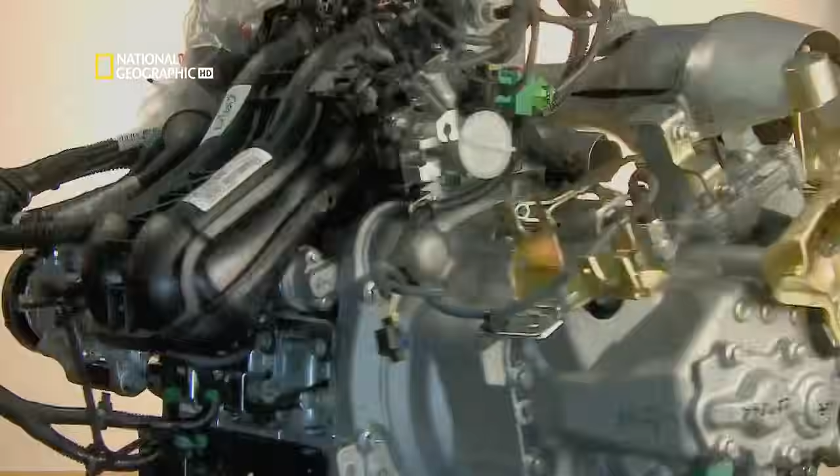And on roads made slick by monsoons, the world's cheapest car. But he'll have to battle skyrocketing costs, huge engineering hurdles, bad press, and violent uprisings. All challenges for the mighty Tata Motors mega factory.

Soon expected to overtake China as the most populated country on Earth, India is already home to 1 in 6 of the world's people. Two-thirds live in small rural villages, seemingly untouched by time. But ancient India is urbanizing at a dizzying speed.

Despite that, only 15 out of every 1,000 Indians own a family car. For most, it's a dream way beyond their reach. They make do with a family motorbike, or get a ride with friends.

But that could change when Tata Motors releases the world's cheapest car, the Nano. It's the dream of company chairman and legendary tycoon, Sir Ratan Tata.

It hit me initially as I saw families riding on two-wheelers, the little kid standing in front of the father driving the vehicle, the mother sitting in the back holding a child, and I thought, my God, this is a really tough way for someone to travel, both in safety and in comfort.

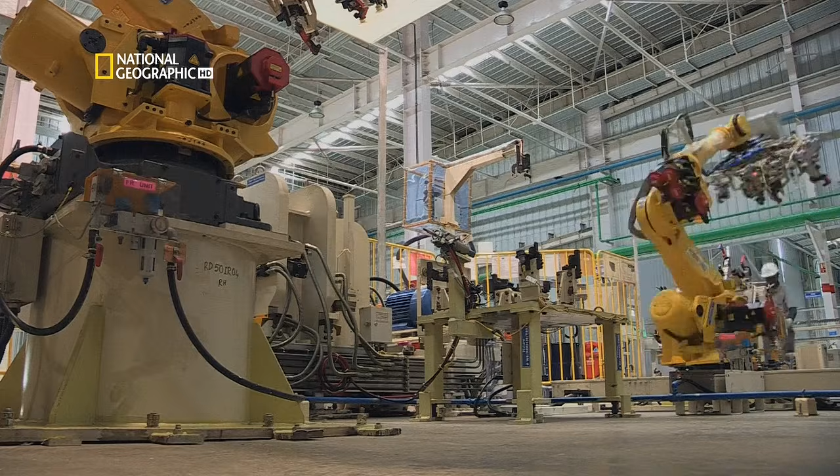But to run them, they'll have to train a workforce of villagers. Just one of the many challenges the team must overcome.

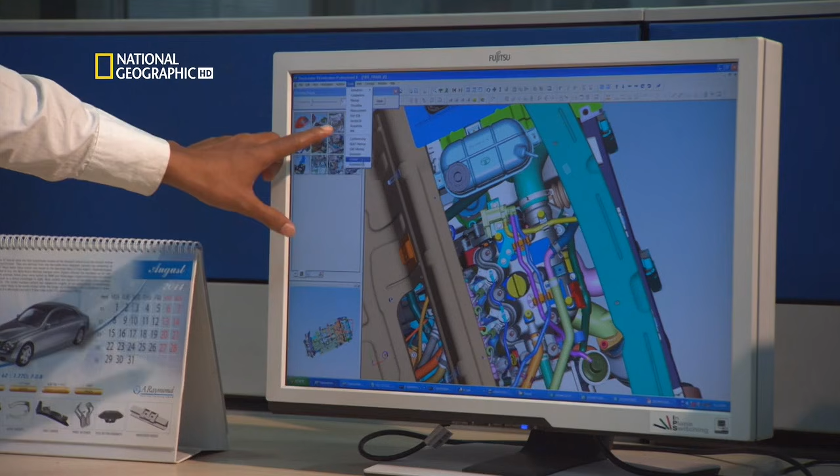They're going to deconstruct the car as we know it and put it back together with fewer parts and at half the cost. They'll have to reduce the cost of everything from design right through to production. But it still has to be a car that people will want. It's a real conundrum. Safety, aesthetics, fuel economy and handling are all going to be important. But if they blow the budget to achieve them, the Nano will lose its unique selling point as the world's cheapest car. No wonder the design team is a little nervous.

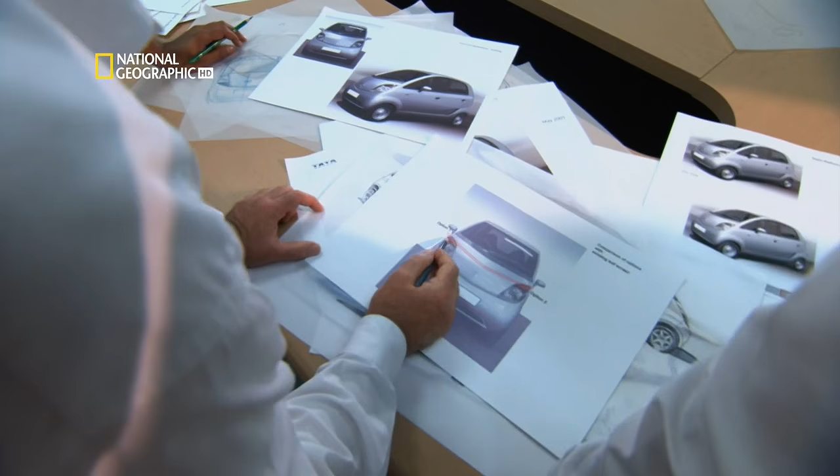The team came back after the meeting with Mr. Tata in 2003. It was really initially very much confusing. Well, there was a lot of doubt whether we can really achieve it. It was really a challenge. We had never heard of a price that low. It was so challenging that I said, hopefully we can do it, but it will be the most difficult project in my life.

If they succeed, the team could make history. The Nano will be a people's car.

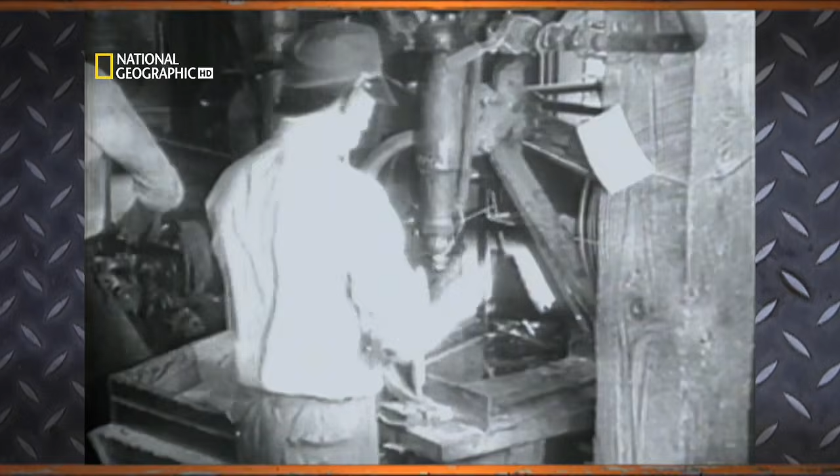India's answer to the Model T Ford. When Henry Ford introduces the Model T, the $850 price tag puts car ownership in the reach of millions of Americans. That's about $21,000 in today's money.

Volkswagen is German for people's car. It goes on sale for today's equivalent of $11,000. The Nano is slated to come in at a quarter of that.

Designing this impossible car happens at the passenger car division of Tata Motors near Pune. Pune is the largest of Tata's 5 plants. It has 20,000 employees. But hardly any of them know what's going on at the Engineering Research Centre. Codenamed Project X3, it's so secret only a select group knows it exists.

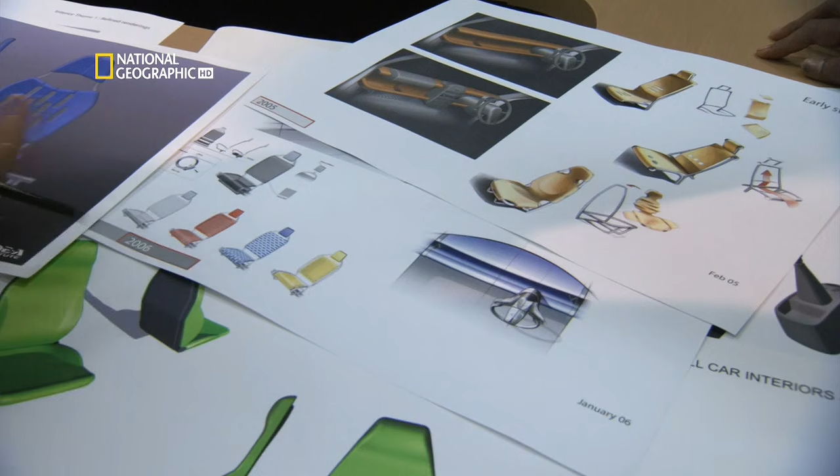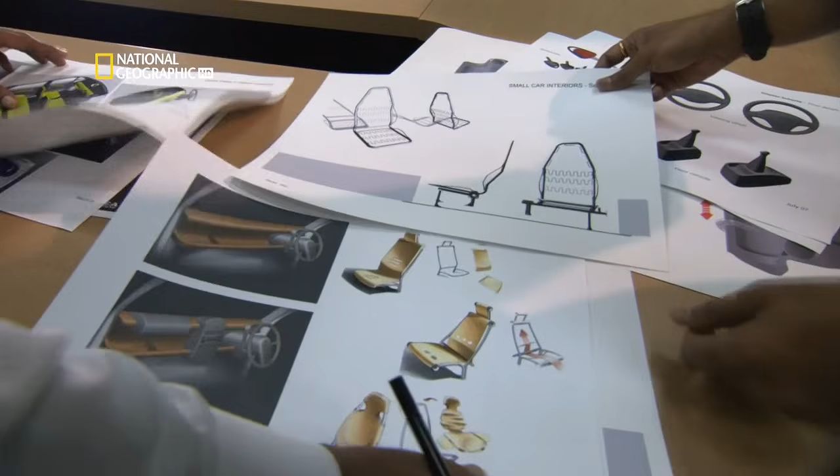As soon as the initial shock wears off, they start thrashing out ideas. So the team initially worked on lots and lots of concepts: how to make this car, whether the car should have doors, whether the car should be made in plastic. We played with really crazy ideas, whether we can use composite materials, maybe paper somewhere. Or whether it should be a 3-wheel, 4-wheel, whether the engine should be in the front or in the rear.

But some of their ideas, like bars to stop people falling out instead of doors, don't sit well with Mr. Tata. Well, they looked horrible. They looked as though somebody plucked an eye out and they were just empty sockets. And that led me to feel that probably a customer wouldn't want a half car.

Tata is adamant that the Nano must have 4 doors. Even 2 doors would greatly reduce costs. That'd be all right in the West, where single-occupant vehicles are the norm. But this is India, where people ride 4 to a motorcycle. They're going to put at least that many in a car. And for women in traditional saris, clambering into the back of a 2-door car simply isn't an option.

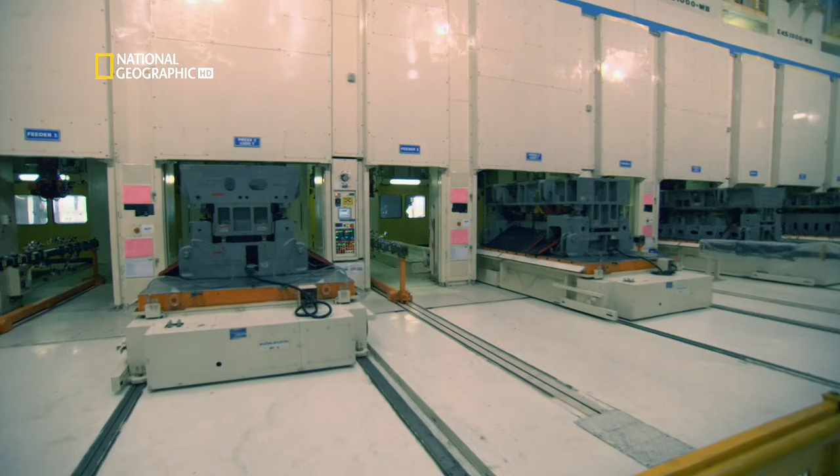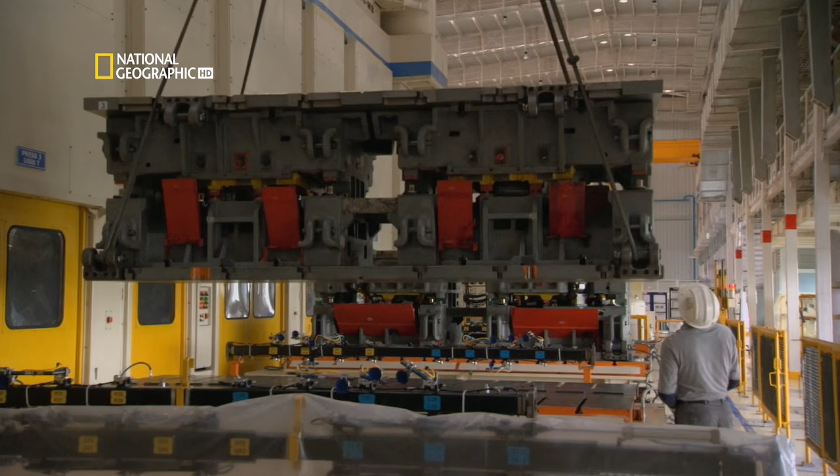Why is it more expensive to make a 4-door car? For one thing, it takes 3 production lines to make 1 door. And it starts in the press shop, where raw steel is shaped into panels. It takes 5 cast iron dies, each weighing more than a bull elephant, to make 1 door.

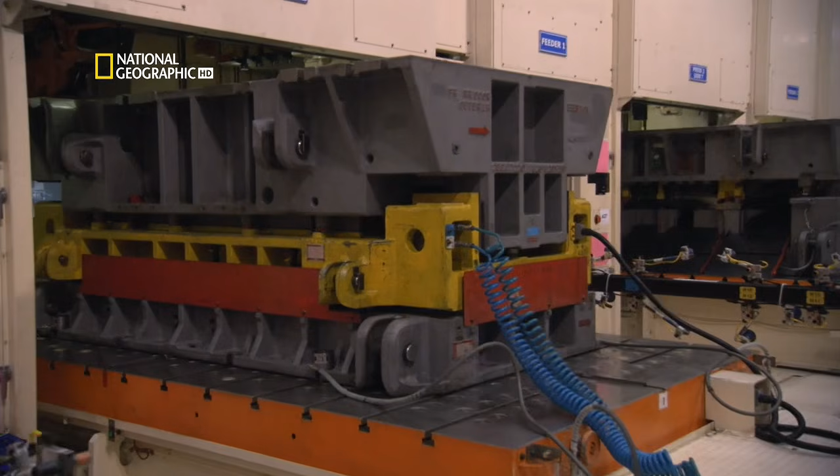The high-speed tandem press can stamp out 2 sets of panels simultaneously. Sheets of steel are fed into the press by forklift, much faster than the overhead cranes used in most press shops. Then the tandem press gets to work.

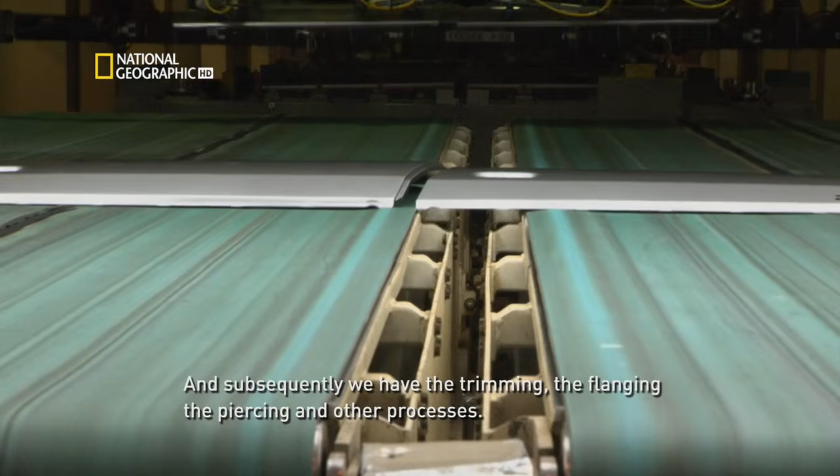First of all, you will have the basic shape of the car, and thereafter the extra parts will be cut off. And subsequently we have the trimming, the flanging, piercing and other processes. In a minute, we can make max 14 panels.

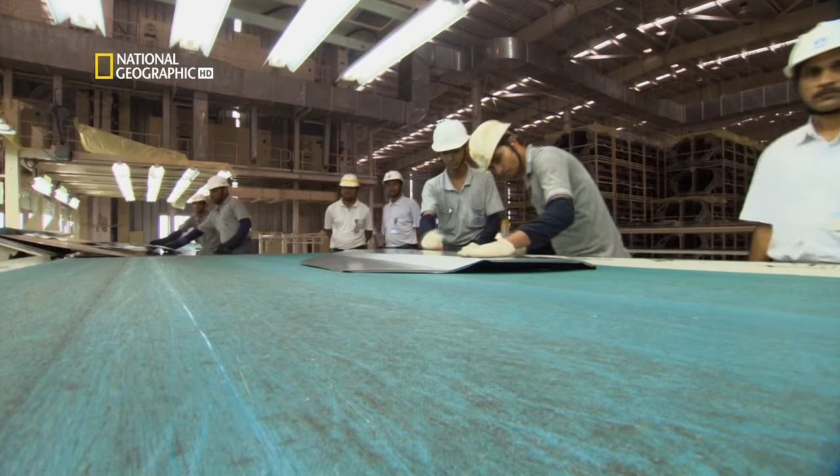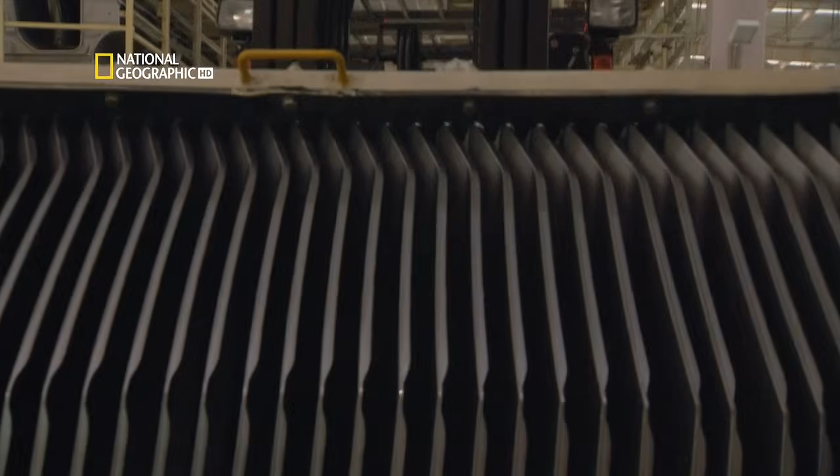The finished panels are inspected for tiny imperfections by hand. Only those that pass muster are taken to the hemming line, where inner and outer door panels are joined together. It's a job that takes 2 robots and humans to feed them.

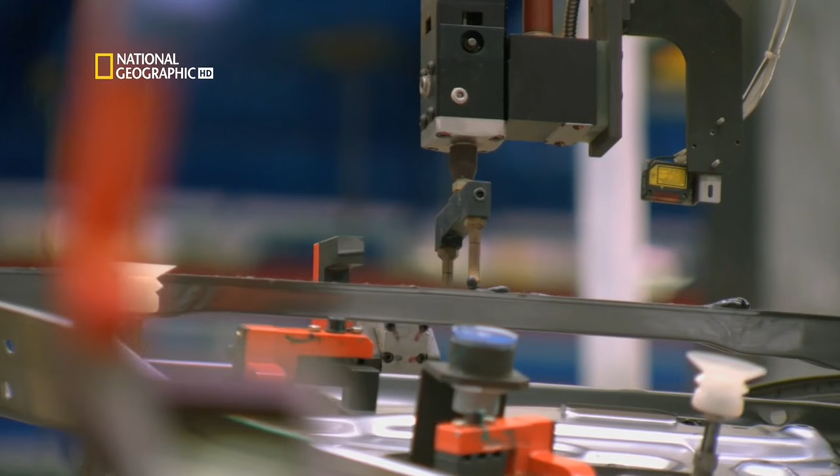First, a robot applies a noise-absorbing foam between the panels. It presses them together and folds or hems the panels to join them.

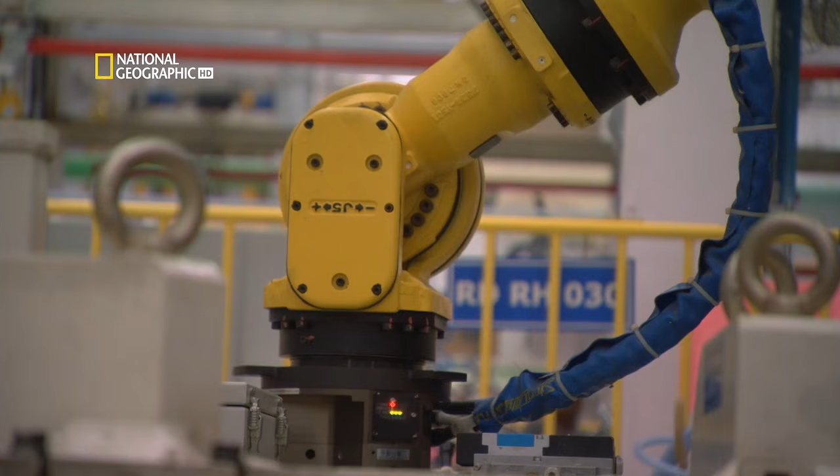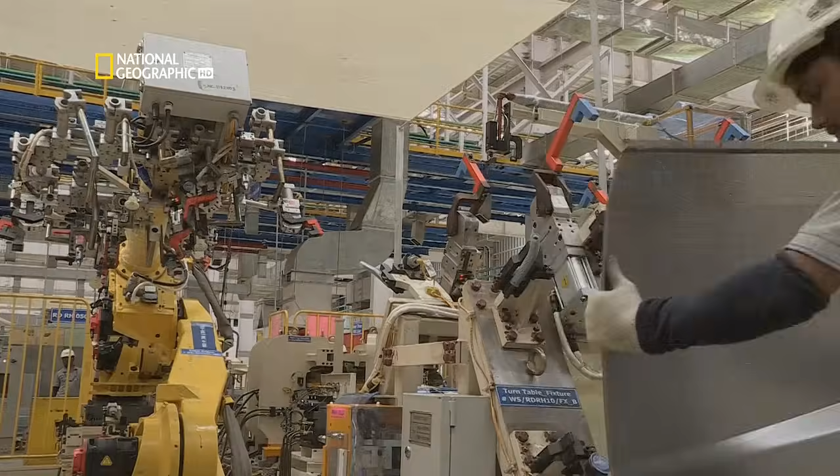Robots help keep costs down, but achieving the Nano's 1 lakh price tag starts at the design phase. Despite the cost, the team manages to include 4 doors.

Now they can turn their attention to the heart of the car, the engine. There are 2 important decisions to make: how big should it be, and will they put it in the front or the rear?

Rear-engine cars are highly unusual. But for designers of compact cars, they have one very big advantage: it leaves room for more people.

It was actually my dream, because I knew to make such a compact car with full space for 4 people, you can only achieve it if the engine is in the back. It is kind of a Volkswagen lesson.

But where the original Beetle's engine is behind the back seat, the Nano's is under it. That means raising the roof, which turns out to be another advantage. The lower the car is, the more difficult entry, especially in India, maybe with different kinds of dress or sari.

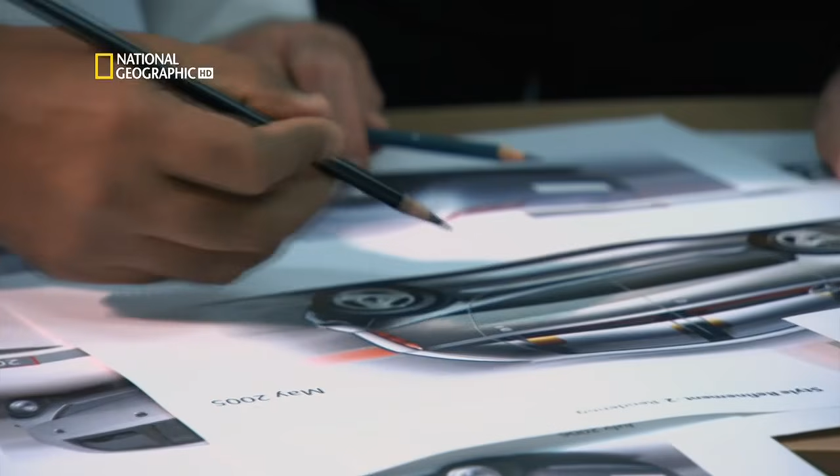There are challenges too, such as keeping the engine compartment cool. I think we will also better address the requirement of cooling, which is coming from the engineering side.

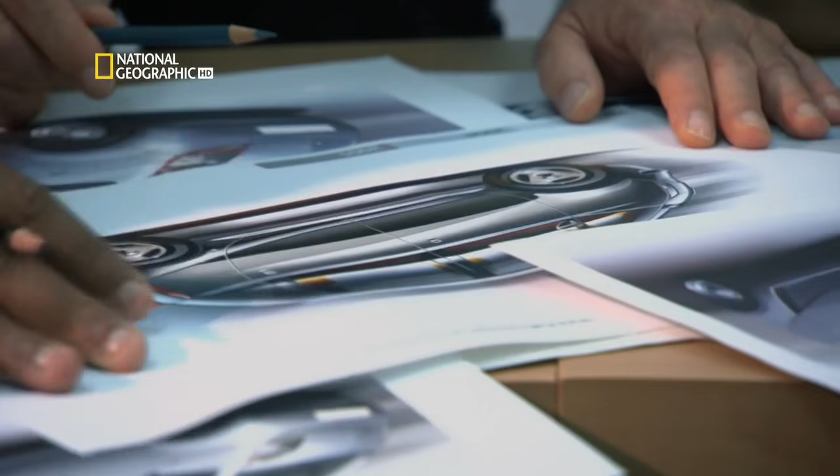After many attempts, the team places air scoops behind the rear doors. It sort of shows that it's a rear engine, so it has a nice cooling duct created like a rear engine. Also this quarter here is much better, clean, simpler, and yet makes the car look much more sporty.

Designing the engine itself is a job for Tata's legendary engine designer, Narendra Jain. To keep costs down, he decides to go with just 2 cylinders. The 2-cylinder engines were stopped worldwide in the 1970s, if I remember.

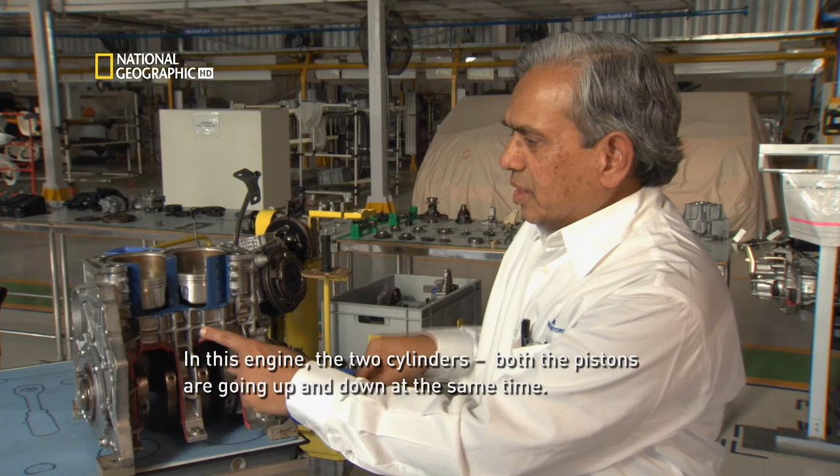There's one big drawback to a 2-cylinder engine: it's inherently unbalanced and prone to violent shaking forces. In this engine, the 2 pistons are going up and down at the same time. If we see, there are 2 counterweights to balance the mass of this piston and connecting rod which is moving up.

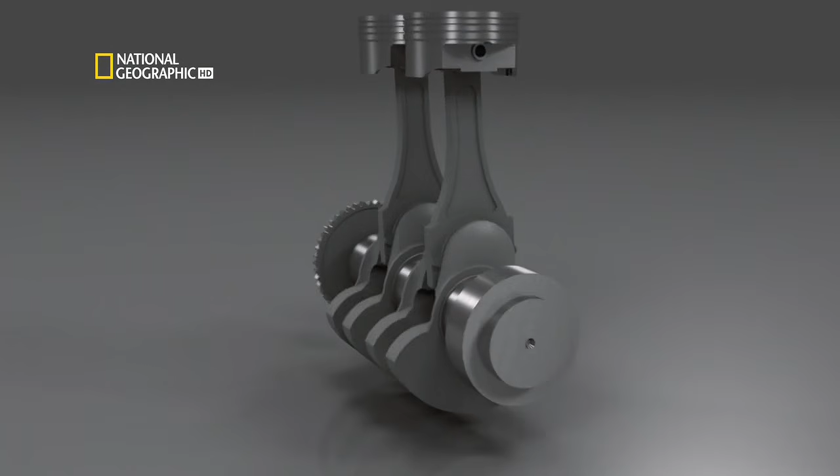The weight of the pistons moving up and down is balanced by weights attached to the crankshaft. While the pistons move up, the weights on the crankshaft move down, balancing the vertical movement.

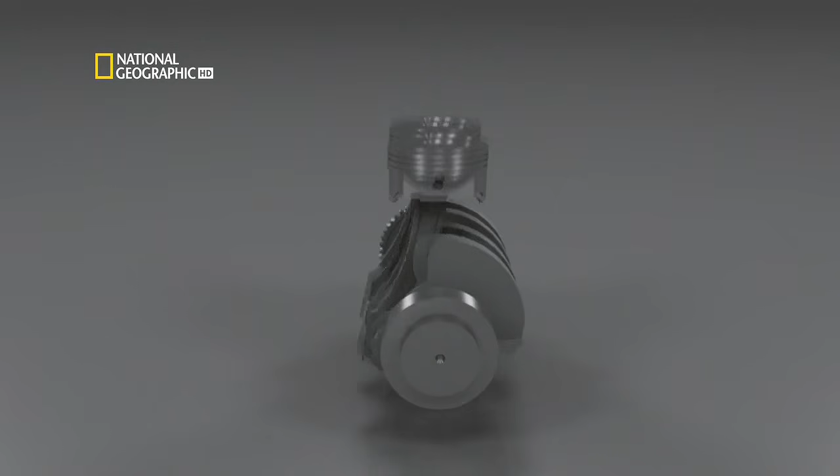But the crankshaft weights don't just move up and down, they turn around, which means the crankshaft now creates its own horizontal shaking. To counter that, Jain designs a single balance shaft. This weighted shaft spins in the opposite direction to the crankshaft, so it cancels most of the horizontal shake. Damping down the shaking with 1 balance shaft instead of the usual 2 means another cost saving.

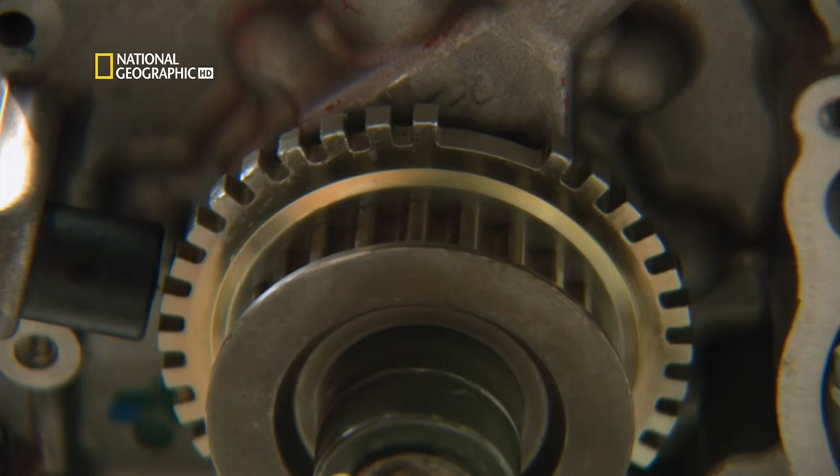But will it power the car? To find out, they mount it on a simple frame, known in the trade as a mule. So the mule is like a very, very early pseudo prototype, or the first thing that you see.

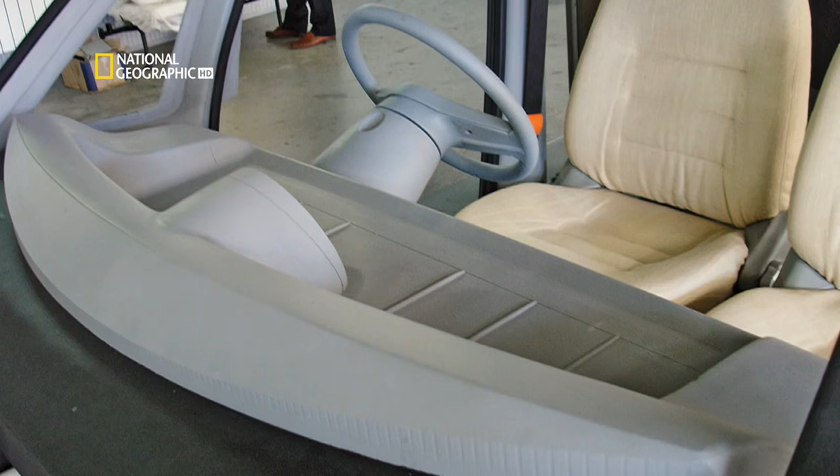This is what it will feel like. It gives you the idea of what the car feels like when you drive it, when you turn it, when you try to push the engine. The mule is the culmination of almost 2 years of work on Project X3.

Showing it to Mr. Tata is a pivotal moment. I drove the mules through the cycle. The first one was very disappointing. The mule is woefully underpowered, so he drove it and was not very impressed. We were waiting at the test track to hear his reaction, and people who were with him on the car said that he was not very thrilled when he drove it.

It's time for some fresh blood. Enter Girish Wagh. He's just successfully developed a light truck called the Ace. The tiny 2-cylinder Ace is a smash hit, but can he do the same for the Nano?

The first priority is to sort out the engine. We increased the capacity of the engine, and believe me, this takes almost 9 to 10 months to do this kind of a job. We put it on a prototype again. It was refined enough so that you felt it didn't sound like a motorcycle with 4 wheels.

He came again, he drove the vehicle, and he said, I think now from a drivability point of view, we are there. The little engine that could comes together in the powertrain shop.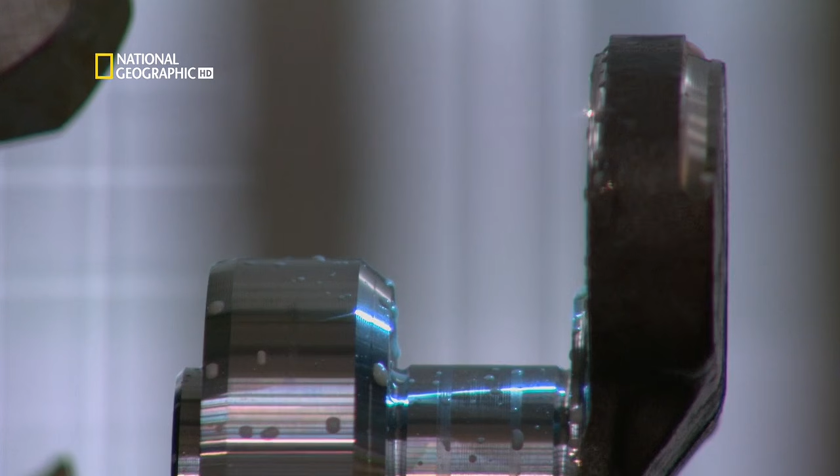Men, women and machines work together to make everything from the crankshaft to the engine blocks. The final assembly of the 35 horsepower engine is all done by hand.

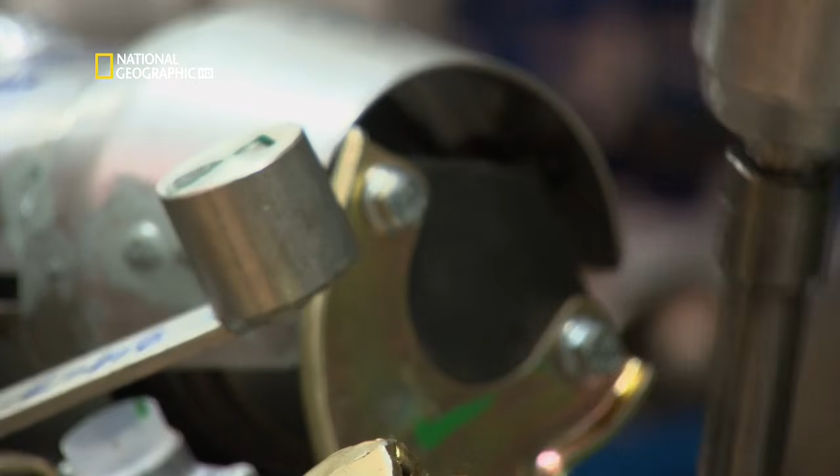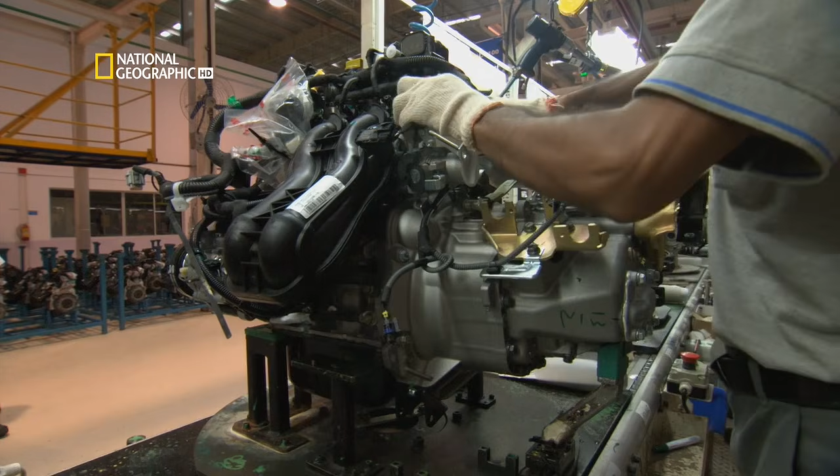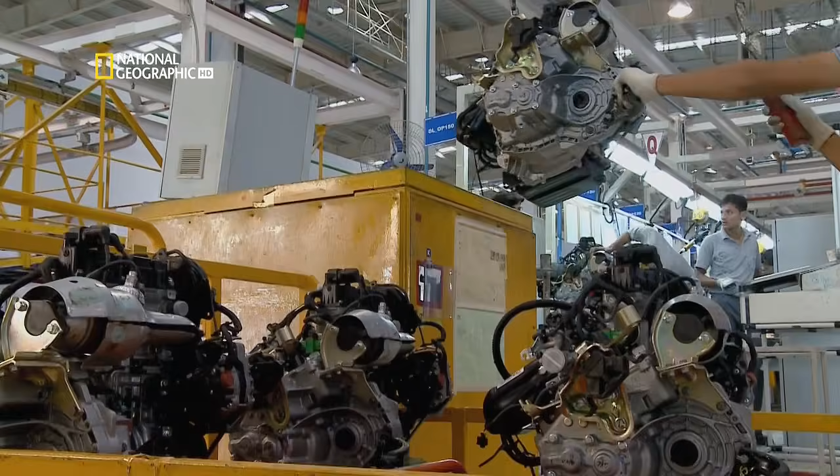Skilled workers join the modest little power plant to a 4-speed manual transmission. This will see the Nano get an impressive 24 kilometers per litre, making it the most fuel-efficient petrol car in India. No point in making an affordable car that isn't affordable to run. The engine is also a lot cleaner than the polluting used cars and motorcycles it aims to replace.

While the powertrain is assembled, a body is born in the weld shop. Joined to the press shop, the weld shop takes in 11 kinds of body panels, which will be welded together to form a steel unibody.

Most cars are made like this, but steel was not Team Nano's first choice. One word: plastics. Initially, when we started, we thought we'll go for a plastic body instead of a sheet metal, and the idea was to reduce the weight. But it's an idea ahead of its time. We found out that if we go for plastic, from a cost point of view, you are not better, you are worse. And India may not be the right place for plastic cars. In terms of Indian driving conditions, in terms of the dentability, the sheet metal is better. If you have some dent, you can repair it very fast. You need not change the panel completely. So steel it is.

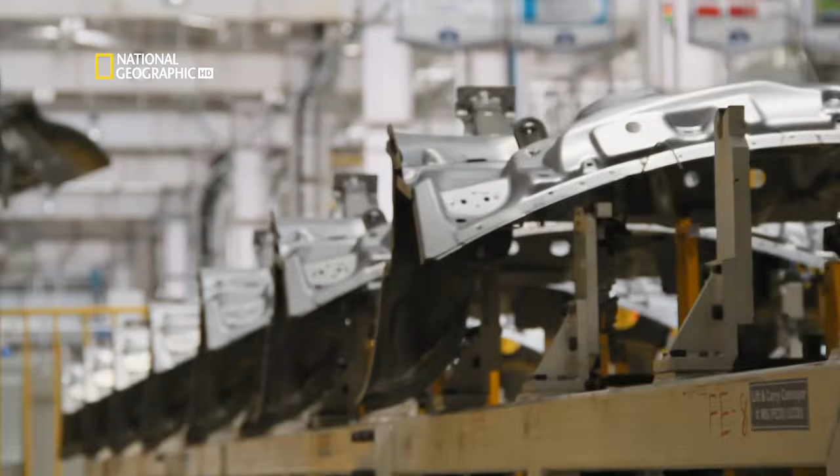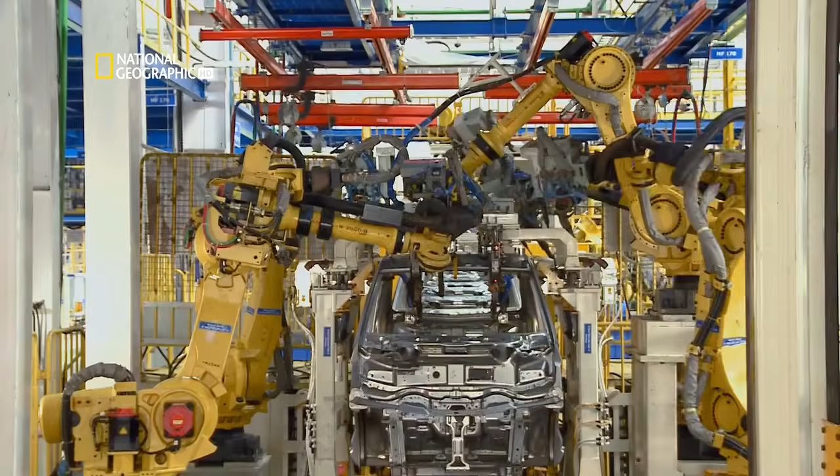130 robots in this ultra-modern mega factory weld it together with ruthless efficiency. But raw material prices increased 40% between Tata's announcement of a 1 lakh car and the start of production. Perhaps the greatest fear in my mind was that as we transformed to a conventional process, we would not make the price line that we had thought of.

For Tata, a promise is a promise, and it's up to his engineers to deliver on it. So how do they do it? From our experience, I don't think there is a single magic bullet. We have to work on each and every part in the car and see how we can reduce the cost of that part, or eliminate some of the parts, or combine the functionalities so that finally the number of parts comes down. They call this minimalist approach Gandhian engineering.

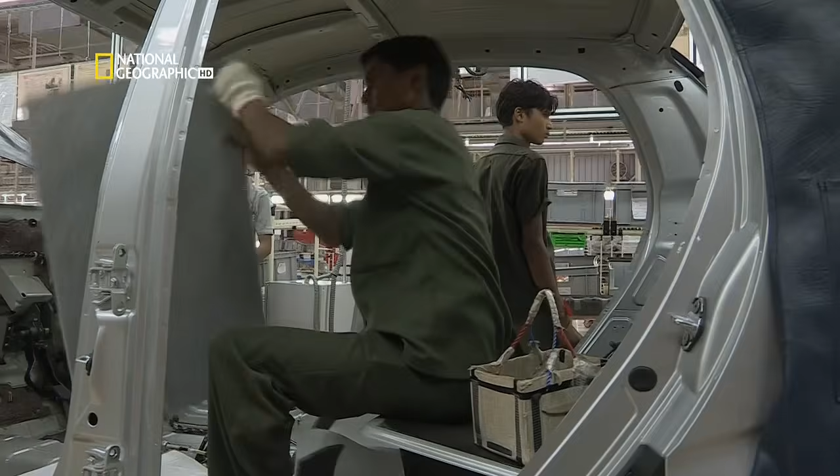Nothing goes unquestioned. This is the fuel pump unit, which goes into the fuel tank. There are 5 basic components here: the fuel pump, a pressure regulator, a rollover valve, a fuel level sensor, and the flange which holds everything and mounts it onto the fuel tank. To get the price of the whole unit down, they ask the supplier to reduce the cost of each individual component. They propose the pump from a motorbike, because our engine is very small, a 2-cylinder, 624cc engine, so it makes sense that this capacity is enough.

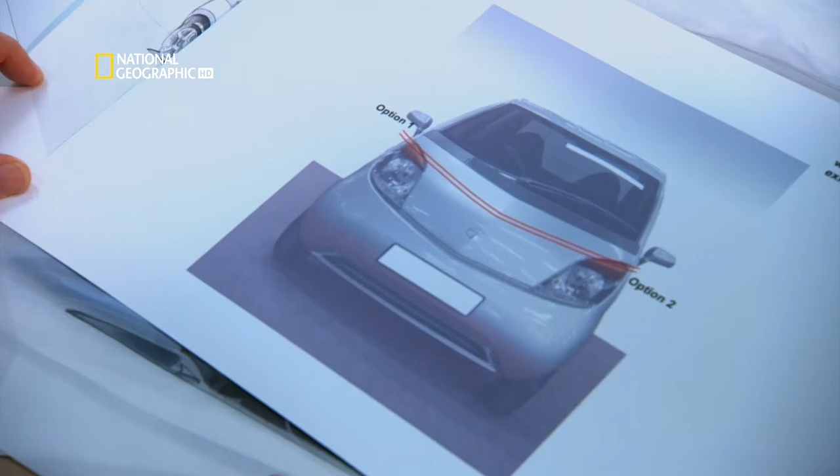For all their clever engineering, the designers are most proud of the Nano's looks. The lamps are like eyes, a little bit smiling. I like the idea of big lamps, Nikhil, because we have to have some element which shouts to the people and which shows character to the car. If not, we'll finish with plain surfaces and nothing. Horizontal lamps and a curved bonnet give the Nano an almost human face. The team feels sure it's onto a winner. We need a strong element, a very singular strong element.

But Mr. Tata wants one more change. This was almost a week after we signed off the final design. He observed the car and noticed that the nose dived down rather quickly for the length of the car, and he thought it'd make the car look snub-nosed. He wants it to be 100 millimeters longer. At the same time, they have to move the wheels out to the very corners of the car to free up more space for passengers. The car was so compact that we had a little bit of a problem making a nice shape. So this extension actually improved packaging, improved stability, and also improved styling.

But the changes mean pressure on the entire team. And we really worked 48 hours a day. We had to work really hard then. And when he saw it, he was quite happy. And I think after 2 weeks, we had signed off the CAD concept.

Before they reveal the prototype in public, it must pass a punishing series of tests that simulate Indian road conditions: tight turns for narrow city streets, a torture track as rough as any Indian road, a 30-centimetre water trough mimicking the monsoon floods. You could even take your Nano to the Himalayas. It handles steep hills and has been tested and approved at temperatures as low as -50 degrees Celsius.

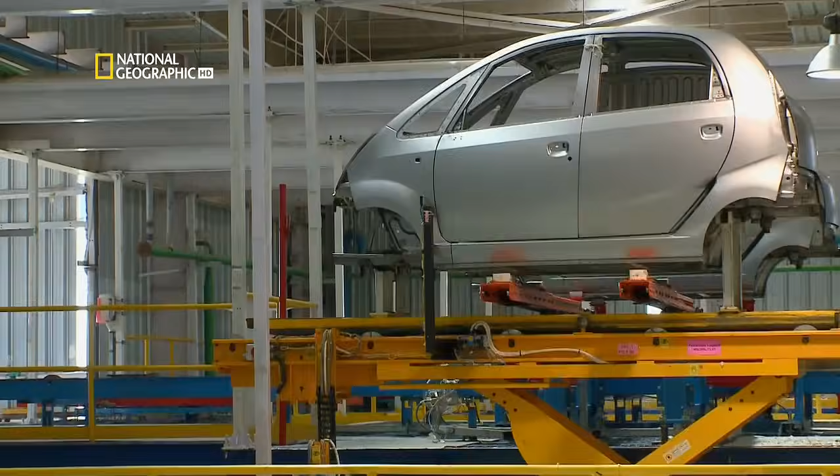Back at the factory, it's time to kick the production line into top gear. First stop, a good coat of paint. The paint shop is a short ride by skybridge from the weld shop. The industry calls an unpainted car frame a body in white, or BIW.

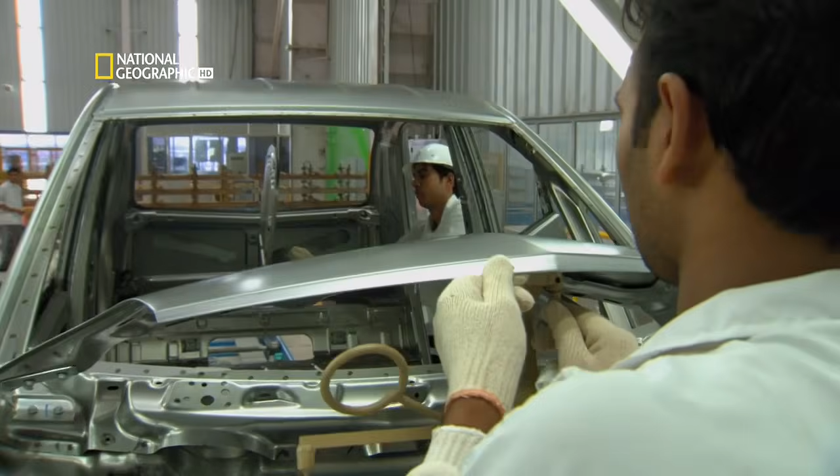The doors and bonnet are clamped open so that the paint can reach everywhere. The BIW is thoroughly checked for defects. Then it's degreased and prepared for painting.

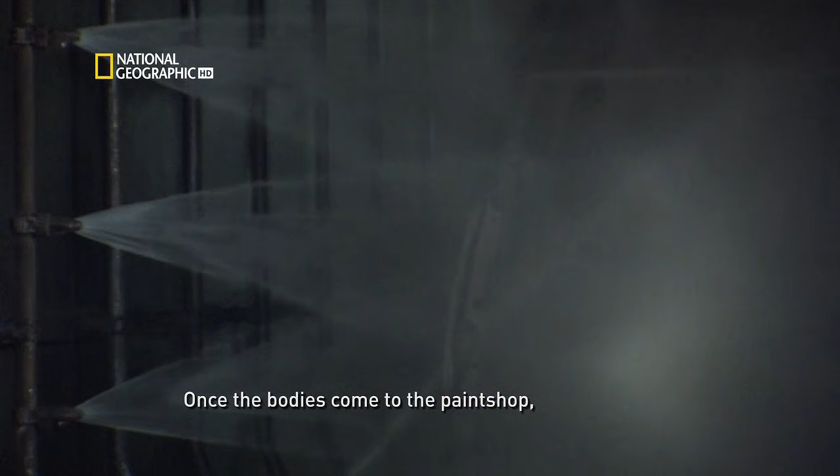Once the body comes into the paint shop, it goes for pre-washing. After the pre-washing, the phosphate coating happens. After the phosphate coating, the body goes for electro-coating. The protective primer is bonded to the freshly prepared metal by an electric current. This coating is extra important in modern cars because the entire structure is made of thin sheet metal. Any corrosion could spell disaster.

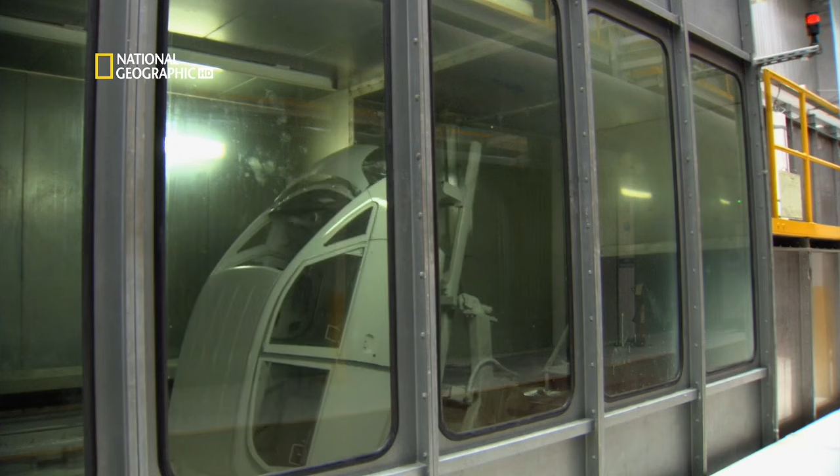Spinning the body 360 degrees guarantees all-over coverage. It means the coating applies to every corner of the body, not only from the outside, but also from the inside. Now the primed bodies are ready for painting. Once again, they're inspected. Then the insides are painted by trained technicians, while the exterior coats are applied by programmed robots.

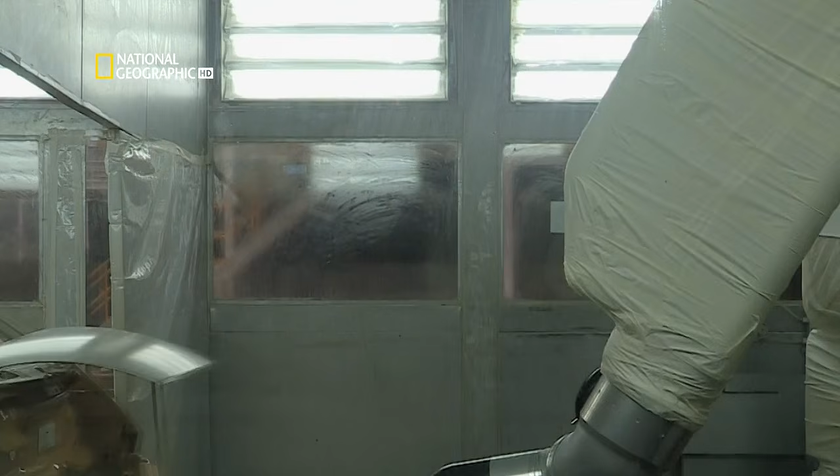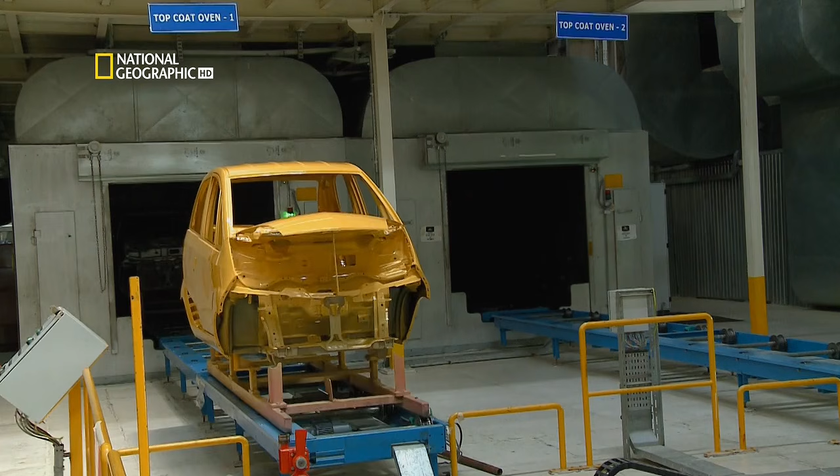In this energy-efficient paint shop, all the paint coats can be applied in quick succession. The bodies are only baked once all the coats have been applied. The paint shop is one of the most expensive parts of any car factory. And this is the second time Tata Motors has had to build it.

They built the first paint shop in 2007 at the original Nano factory in Singur, in the communist state of West Bengal. We went to West Bengal because we felt that part of the country had been vacated by industry for some time, and I really believed that the government of West Bengal was genuinely keen on bringing industry back. So with a leap of faith, I convinced the board that we should go there.

But ownership of the land allocated to Tata by the government is disputed by local farmers. From the outset, they try to thwart construction. We had a fair amount of people beaten up, material being stolen, walls being broken. For two years, Tata holds out, but eventually the situation becomes untenable. At one stage, I think at the height of the problem, there were close to 100,000 people outside the gate. They were now just weeks away from opening, but it was too dangerous to continue in West Bengal.

That decision to close the plant was a very painful decision, you can understand it. I can't explain to you the feeling that we went through.

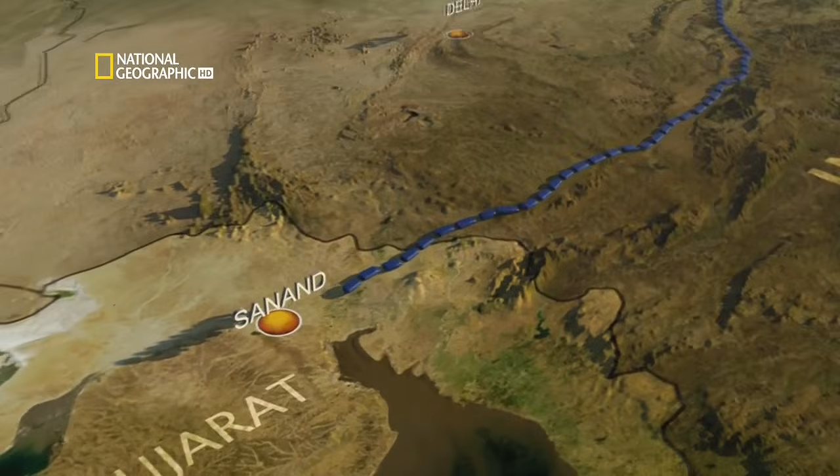Much as it hurts them, they're going to have to move the whole operation 2,200 kilometers to a friendlier home in Gujarat, on the other side of India. One already difficult project suddenly becomes three. One project was dismantling everything in Singur. Another project was setting up everything in Sanand. And the third project was to do some interim arrangement for production of some cars. With 200,000 pre-orders to fill, some Nanos will have to be made at another of Tata's factories.

Meanwhile, factory head Ramesh Vishwakarma has to move the brand new $300 million factory, and he has to do it fast. My project head, Mr. Girish Wagh, asked me, Rameshji, can you do it within 1 year?

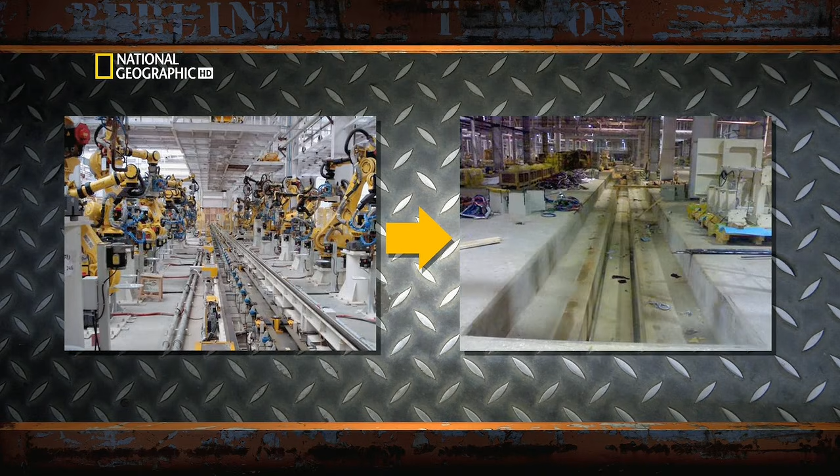That night I kept on thinking what to do. The robots are ready for work, test production has started, but they have to pull down the factory and start again. It'll probably be the world's biggest ever relocation. And as if that wasn't enough, the project is now dangerously behind schedule. We were a little worried because it was a Herculean task. Dismantle, shifting, installation and recommissioning, the total period was only 1 year.

It takes Ramesh 3,400 truckloads to transport the factory, lock, stock and barrel, across India's notorious roads. A single road accident could derail the entire project. Such huge plants needed to be shifted, but we did it successfully. There was no loss of parts, no damage, although we shifted 2,250 kilometers away from Singur to Sanand, but still we maintained the quality.

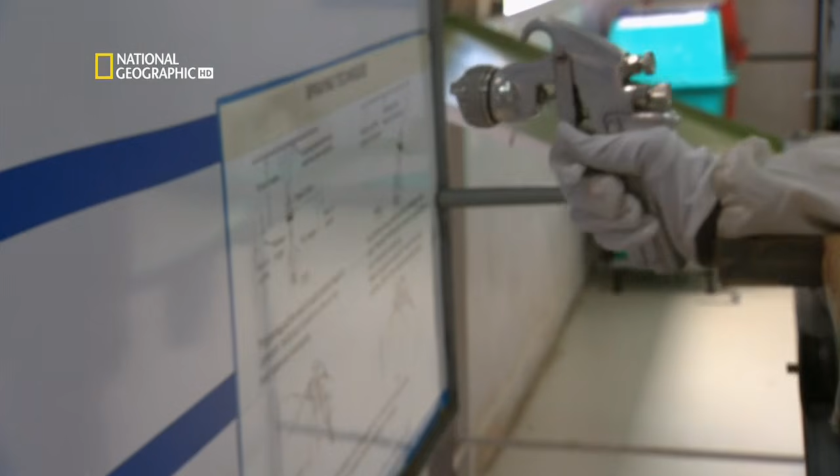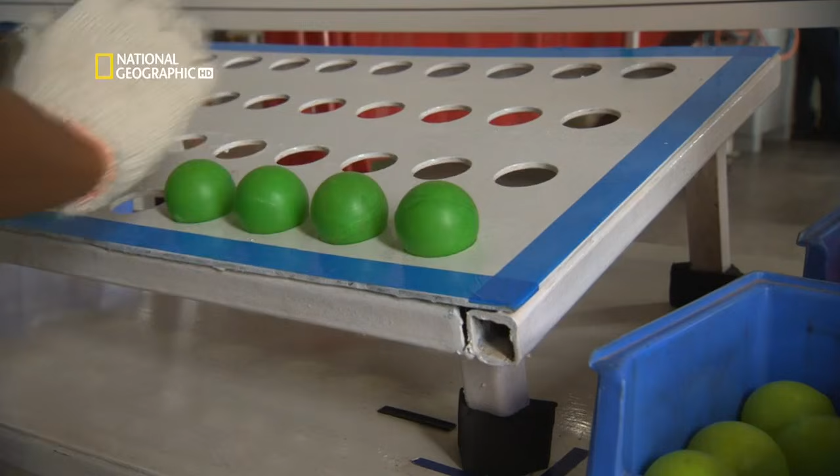Now Ramesh faces a new problem: there are few skilled workers to crew the factory in rural Gujarat. They'll have to train hundreds of villagers in a specially built training centre at the factory. Trainees enter at 18 years. They'll learn basic skills, like painting techniques. You have to learn the correct movement before you're allowed to practice with water. You have to learn to tighten bolts at any angle, to pick up and place parts in the right order, before you graduate to assembling a Nano on your own mini production line.

They've just overcome two massive hurdles, only to be confronted by another. Some of the early Nano models catch fire on public streets. It's a public relations nightmare.

Team Nano swings into action, setting up a team of local and international experts to investigate the fires. We said, let's look at it in a positive manner and let's do something even safer. We did a very thorough investigation and analysis of the situation. We also got some forensic experts from abroad, from the UK, and they looked at all the incidents and gave a totally clean chit, saying there's nothing wrong with the design of the car at all.

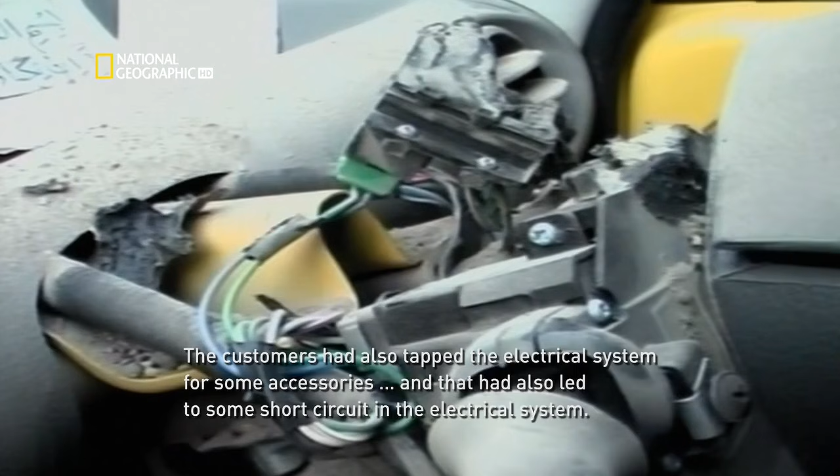In some cases, we found that a foreign piece of cloth was left on the exhaust system of the car. Customers had also tapped the electrical system for some accessories, which led to a short circuit in the electrical system. In response, Team Nano decided to make the car even more robust. On the exhaust system, we provided additional protection, and in the electrical system, we added additional protection in terms of fuses, etc. Whatever causes we identified for the fire incidents on the Nano, we provided additional protective cover to ensure that such a case doesn't lead to the car catching fire.

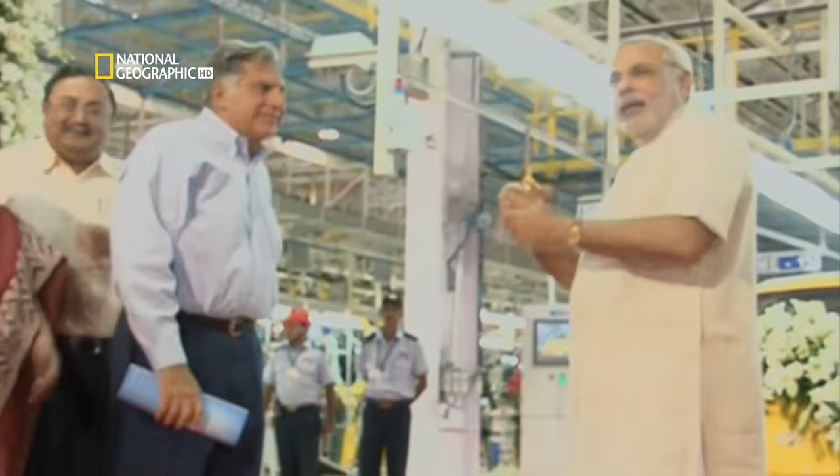With the fires under control, it's time to celebrate. In June 2010, Ratan Tata officially opens his new mega factory. It is a great occasion today to be here, and I hope that in the coming years, we will see the product on the streets and the roads of India, giving the people of India a chance to have personal transport.

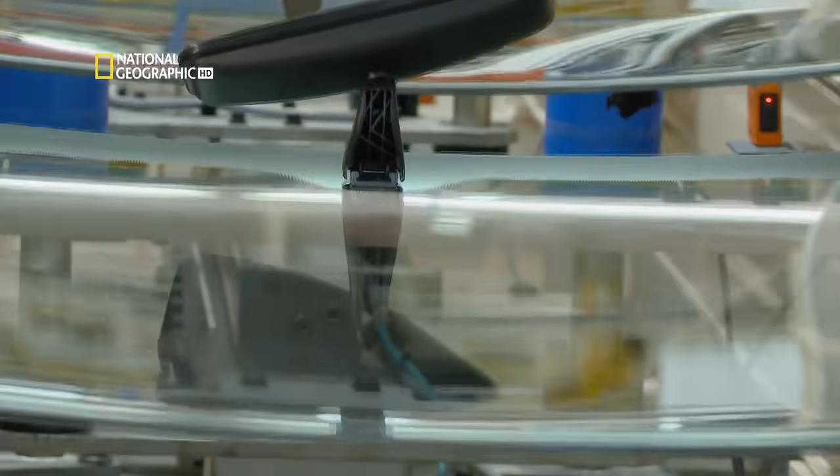Production of Nanos finally reaches top gear. They need to sell hundreds of thousands of Nanos to break even, and that required sophisticated automation technology. We have 70% automation, 130 robots working in the plant, and in the body shop, one body can be produced within 53 seconds.

The painted bodies arrive suspended from a monorail. In 6 short hours, they will drive out under their own steam. First, technicians install the fuel tank and wiring harness on the underbody. Next, the doors, which were painted with the car body, are removed to give workers easy access. Later, the automated system will match them up with the exact Nano body from which they came.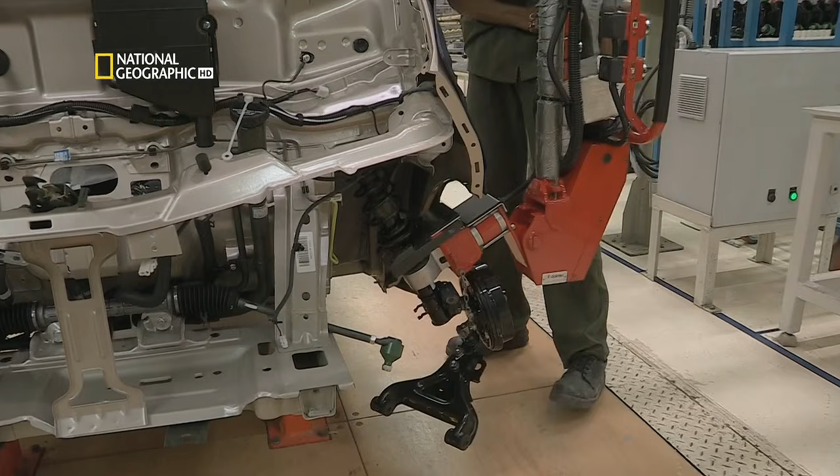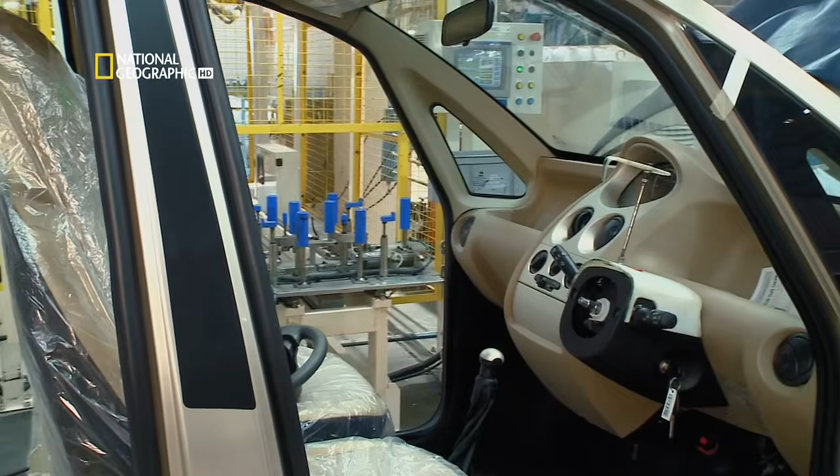On goes the front suspension. In goes the dashboard, the seats, and the steering wheel. It looks ordinary enough, but behind the wheel is another triumph of cost cutting.

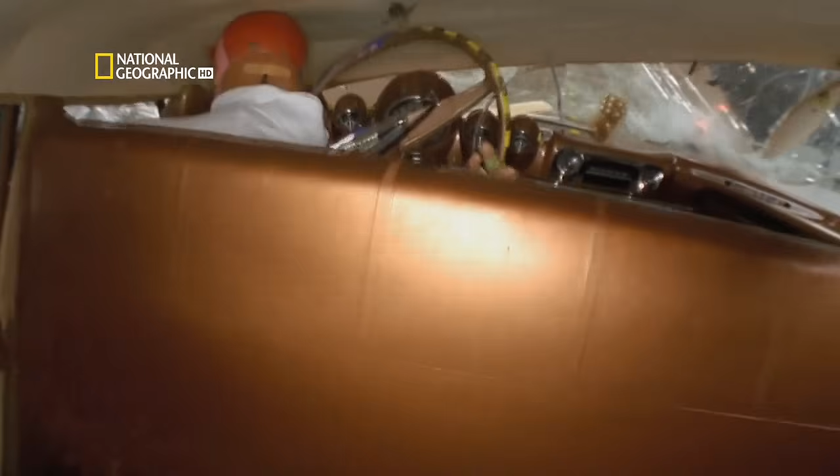Modern cars have expensive steering columns that collapse on impact. Non-collapsible steering columns haven't been used in the West in decades because they cause nasty injuries in a crash. However, Tata's safety engineers wonder if there isn't a way to cut costs without cutting safety. We can now say we don't need a collapsible column. Now with this improved design, we could go ahead without the collapsible steering column.

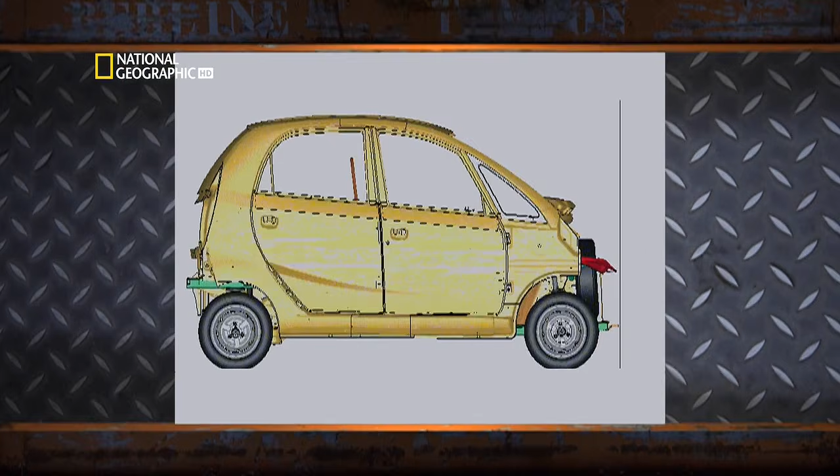Digital crash testing allows them to quickly and cheaply try out new ideas. They discover that instead of a collapsible steering column, they can use the front of the car to absorb an impact. So in the Nano, we had to cut costs. One of the things we looked at was whether instead of a collapsible column, we could just make part of the structure deform a bit and not offer that high resistance to the chest.

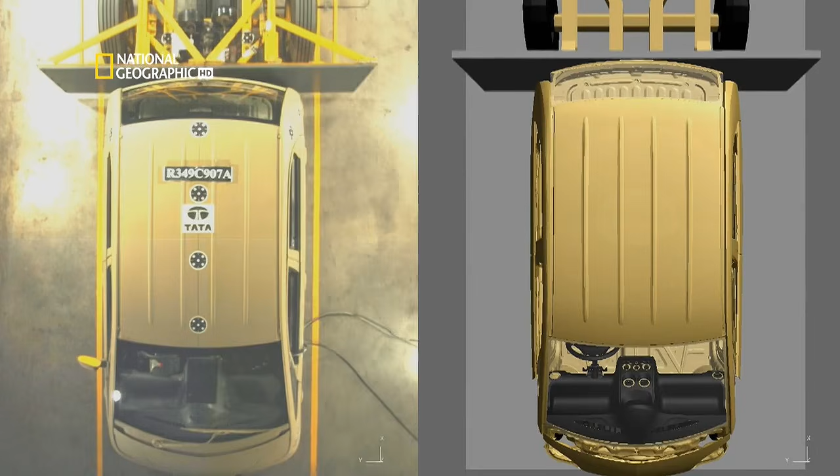And when they crash a real Nano, their findings are confirmed. The trick is having the engine in the rear. It clears off the space in the front of the car. The complete front space was available for crush. So in this case, having the engine in the rear actually turned out to be a big bonus for the safety team. Another big bonus is that rear engines are very easy to install in the factory. It slots in from below.

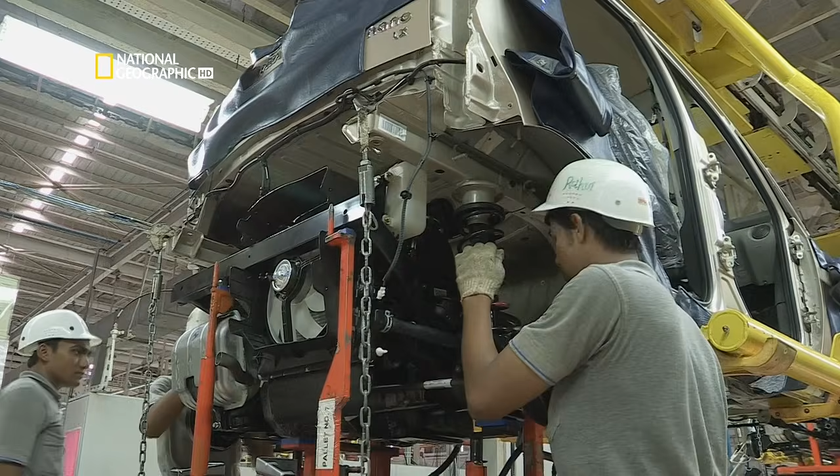The marriage of engine and body is more of a quickie Vegas chapel wedding than an elaborate church ceremony. It takes as much time to connect up the hydraulics as it does to bolt the engine beneath the rear seat.

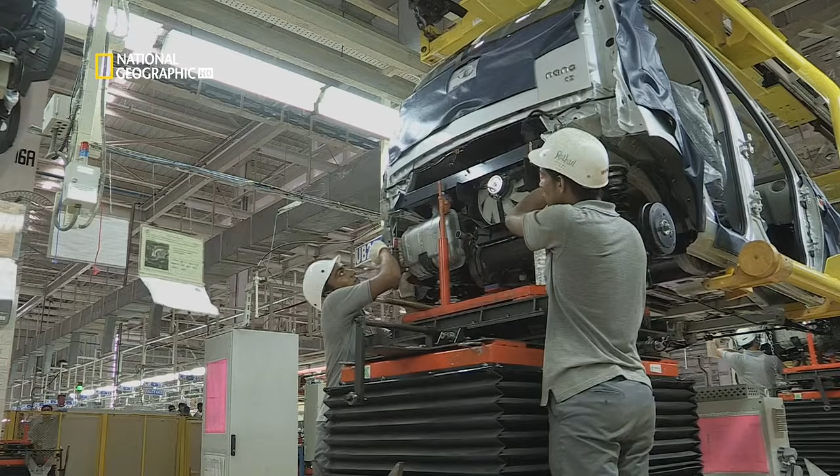But there is one disadvantage. When the Nano's small engine is running hard, it can be quite noisy. And that noise isn't under the bonnet, it's much closer, under the back seat. Reducing the noise becomes the biggest hurdle in the entire Nano project.

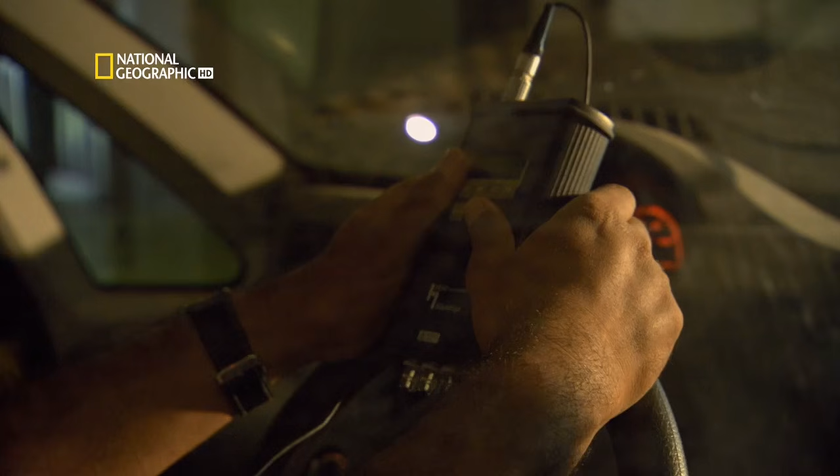So for this Nano, this is a unique kind of car where there is a rear-packaged engine sitting exactly inside the passenger compartment. In this soundproof chamber, the team tests numerous engine mounts and sound-absorbing materials to reduce the noise and vibration felt by the car's occupants. With each change, they measure noise and vibration levels all over the car.

After 3 years of hard work, we have solved all the issues, and right now the car is acceptable for the customer. It's small, it's tall, and it's surprisingly quiet inside.

In the TCF shop, these Nanos are only minutes away from their first ever test drive. Of course, before they can do that, they need wheels. They're one of the last things to go on, and like the rest of the car, they're small.

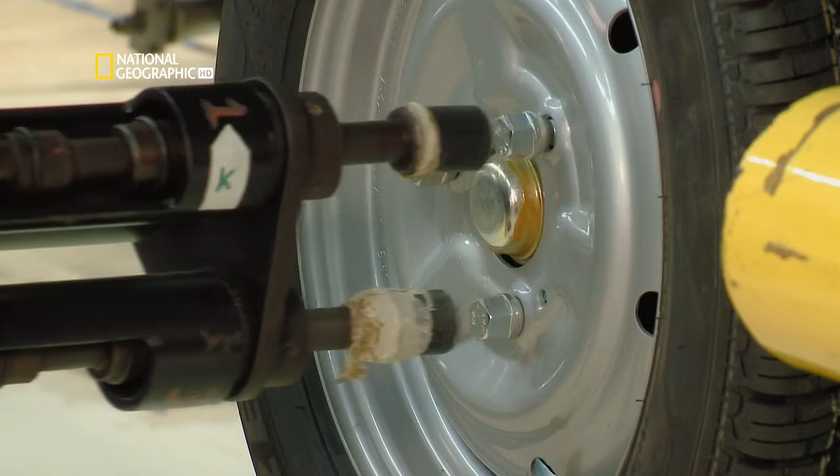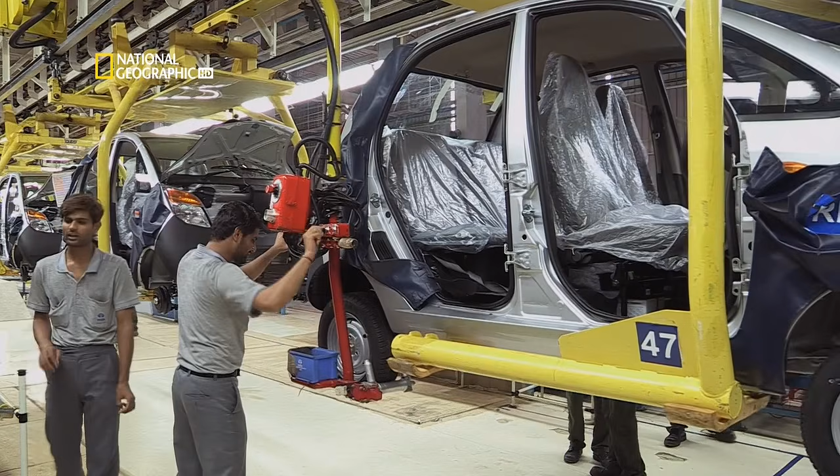But the technicians win the battle over lug nuts. There are only 3. So when we started with 3 bolts instead of 4, we made initial calculations and it really worked fine. We thought for this particular maximum speed of the car, 3 bolts could be sufficient, and it really turned out to be that way.

Finally, each Nano is reunited with its 4 doors. These people's cars are now ready for some people. Almost.

Outside, the rain is taking a break. But it's added an extra level of difficulty to the test track. Every Nano goes through this. And they test the brakes the old-fashioned way.

Tata Motors starts to deliver Nanos to tens of thousands of eagerly waiting customers. Finally, everything is going their way. But if you live outside the Indian subcontinent, don't look for one at a dealer near you anytime soon. There are no plans to bring the Nano up to stricter Western safety specs.

In Europe and the US, Tata will instead offer a car based on the Nano platform. A concept car has already been unveiled. The Pixel is a futuristic-looking car made for city driving. We have tried to bring in a lot of new concepts on that. We have carried forward the rear engine philosophy, like the Nano.

The Nano itself has only been out in the market a short while, but it's been garnering many great reviews. And Tata Motors are quietly confident about its future. I think it will turn into a big movement, I have no doubt in my mind, not just in India, but across the world. It's been a hard road to travel, but Ratan Tata's dream is slowly coming true. I will forever be respectful and recognize the effort the team made, because the real credit for the car and the heroes of this whole exercise are the team that put it together.